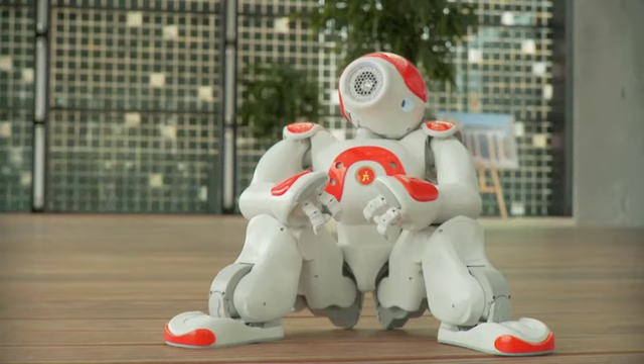I want to come with you.

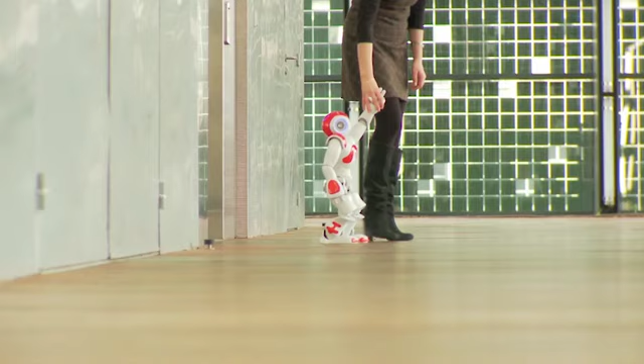Our goal with robots is to have robots helping people, and not only the geek. I want to have robots helping everyone. But in order to do that, we need to have the robot accepted by people.

I'm Bruno Maisonnier, head of Aldebaran Robotics, founder and CEO of the company. Give me something, please.

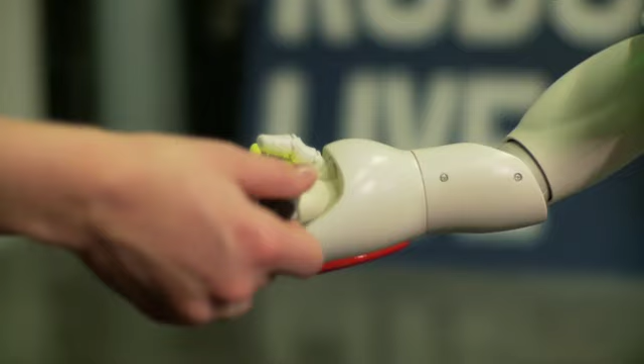We think that the robotic market is going to be huge in the future. And this comes from the simple fact that the world population is aging very fast. And we need robots to do whatever they need at home.

What do you want me to do? When people are depending on someone else and need to have someone else helping them, they are in a secondary position. But when they have a robot doing that, they are in the first position. They are leading.

Notre Dame University, United States, they are really working with robots helping autistic kids. We discovered that robots are objects they can interact with, they are comfortable with interacting with robots, they like it.

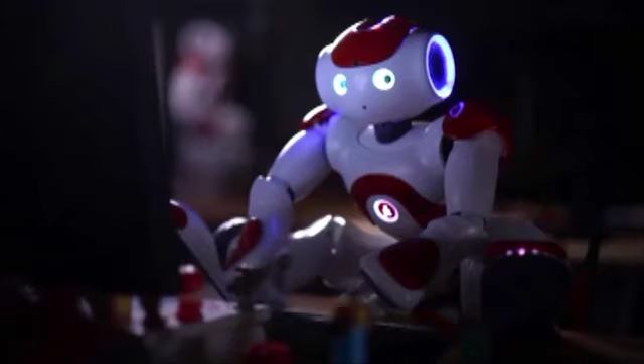The first impression that you get when you see the robots is the outside shapes. If the shape, if the form is too aggressive, you won't interact with that robot.

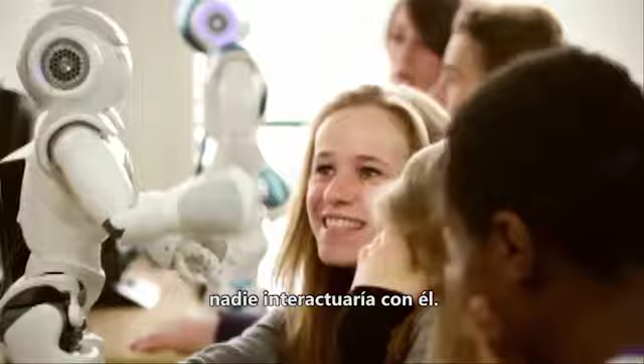There are many people ready to develop softwares, but we are just lacking robots. We are just missing robots. So that's why Aldebaran began with a platform for providing all those who want to explore this new world, who want to be part of this revolution, to be able to do it.

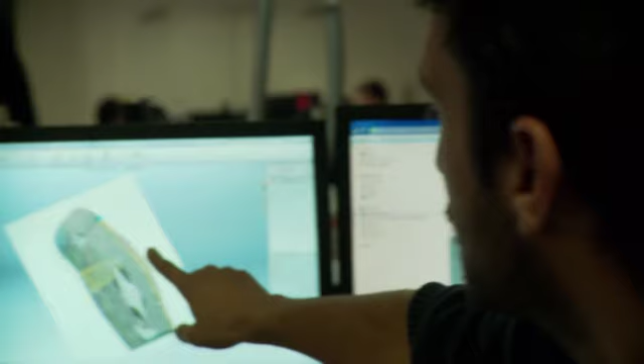I've been working for Aldebaran Robotics for 5 years as a mechanical engineer. I especially work on designing gears and integrating motors into the platforms we develop at Aldebaran.

Well, like Ludovic, I am also a mechanical engineer. I mainly work on the shells, but also on internal parts and the structure.

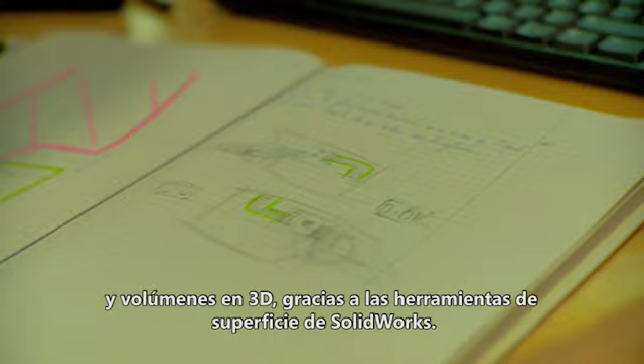For each project, the process is similar. We start with sketches, essentially 2D images, that we then translate into digital data and 3D volumes using SolidWorks surfacing tools.

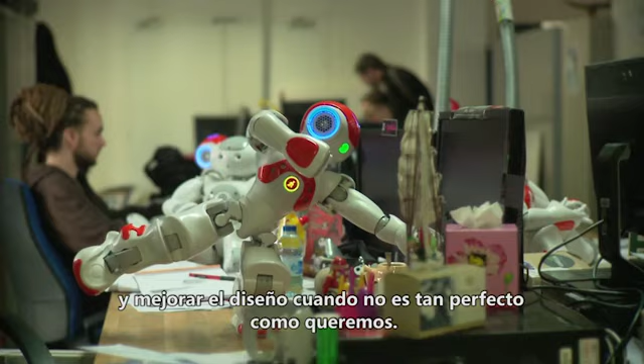This gives us the ability to rotate the pieces and robots in the space and to improve the design when it's not as perfect as we want it to be.

So we start with the exterior design of the hand as we have here. It is smaller than an adult hand. It's the size of a small child's hand. And inside there are over 100 parts just for one hand.

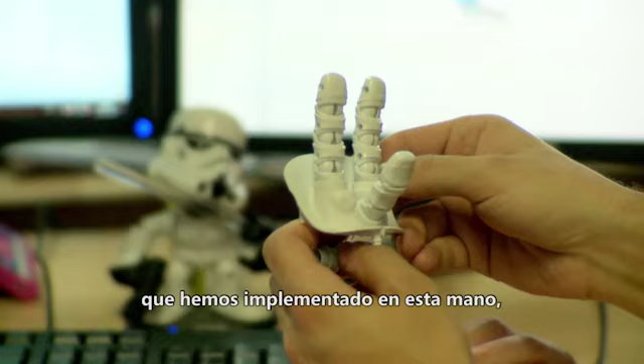In addition to all mechanical constraints, we have 2 degrees of freedom that we have implemented in this hand, and SolidWorks allows us to look at all the possibilities and optimize the mechanical design inside the hand.

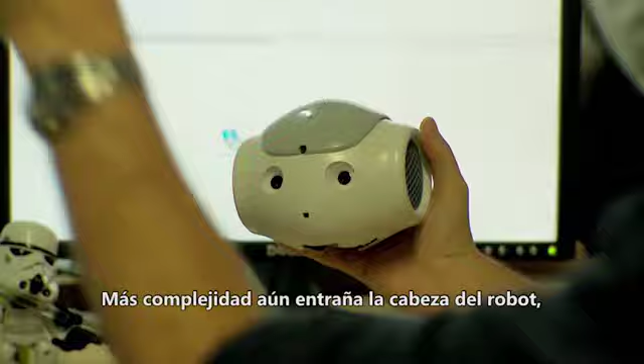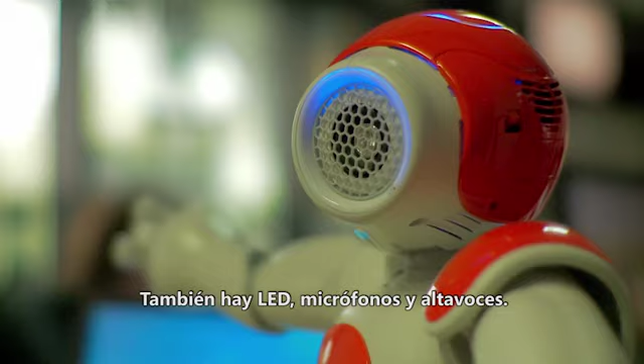Even more complex is the robot's head, which combines mechanical, electronic, and optical components, like cameras, for example. One might say that all of NAO's intelligence is gathered in its head. There are also LEDs, microphones, and speakers.

We use SolidWorks simulation, which allows us to generate digital models and know if the part will resist to shocks or not, based on stresses we apply to it. And once we have proceeded with validation in SolidWorks, we can move on to production.

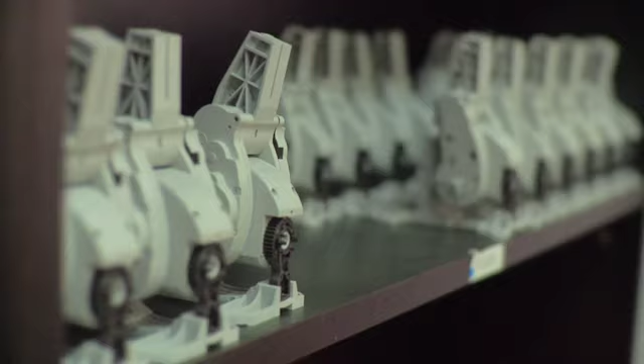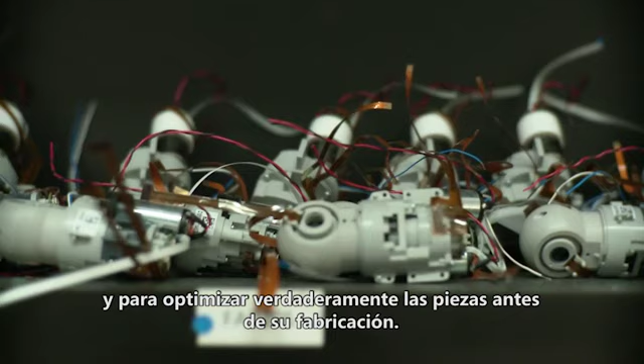We use SolidWorks in order to project the product into the future, and we can really optimize, really improve the parts before it exists, before it is manufactured. You have to know that into that robot there are more than 1,200 plastic parts.

On my team, there are 45 people working on the design, and I need to orchestrate the daily work and make sure that when we create new parts, the version is correct.

So for that we use EPDM, and it helps us to focus on innovation while EPDM is taking care of the structure of the project.

I hate the techno stress. I don't want to have devices that are asking me to invest intellectually to understand how they're working. So I don't want my robots to create techno stress to people.

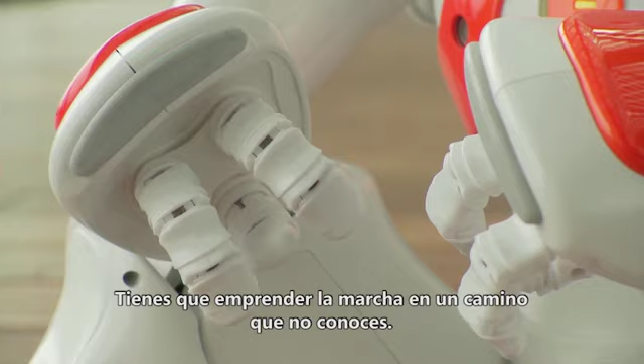When you want to change the world, to improve things, you have to go beyond what you are able to do. You have to decide to go for something you don't know how to do. It's a new territory to conquest. Shall we try something new today?